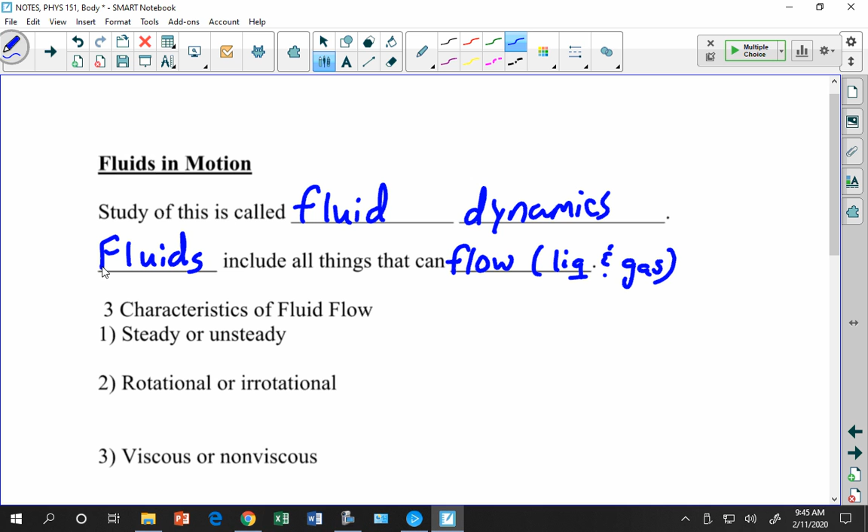Okay. So this study is called fluid dynamics. We've already said this, but fluid includes all things that can do what? They flow, right? That's the root of the word, to flow. And flowing things include liquids and gases. So all liquids and gases are fluids, but we'll see that actually we're only dealing with liquids, and not even all liquids, but just a subset of liquids.

Because we're looking at an ideal fluid flow, we'll need to look at these different characteristics.

I'll know pretty soon. All right, so characteristics of fluid flow. Along the way, I'll circle the ones that are for an ideal fluid, but you can probably guess as we go through them, or you probably already know it. They can be steady or unsteady. An ideal fluid flow, which is what we'll be dealing with, means that the velocity at a point doesn't change.

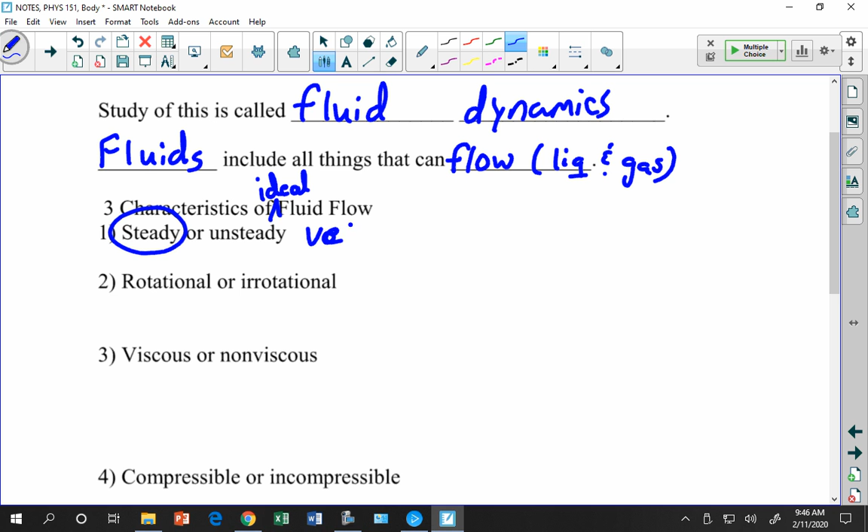And the important thing here is at a point, because we'll find that the velocity of our fluids will change quite a bit depending on their scenario. But what we're saying is that at one point, at that particular point, or any one point in the fluid, the velocity will be constant.

Rotational or irrotational, which one of those is a characteristic of an ideal fluid? Irrotational, right? It doesn't rotate.

Yeah, that's a funny prefix, isn't it? Ir. Are there other words that have that as a negative prefix? Irregardless? Irrational? Well, there are a lot. I just thought it was that one word. But I guess anytime you have a word with R, it takes the IR prefix. Is that right? It sounds right to me. I just made that up. I think it might be true.

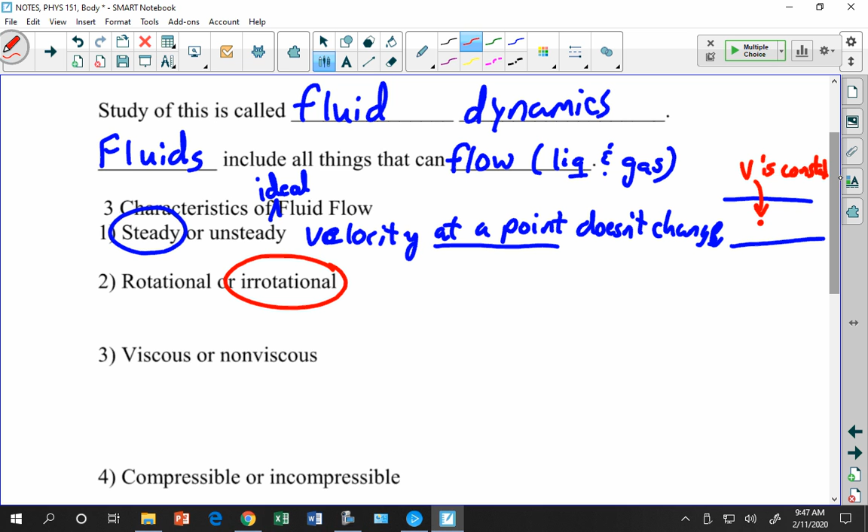Irrotational fluids simply don't rotate. Can you think of a good example of a rotating fluid? You can, you're just too embarrassed to mention it, right? The toilet. When you flush the toilet, that's a rotating fluid. Were you thinking of something else? What was it? Okay. Anyway, so that's a rotating fluid. It's not ideal. We're not going to consider that. We'll just think of fluids that flow in a straight line.

And then viscous or non-viscous, we're looking at non-viscous fluids. Viscosity describes the friction between the molecules. That was straight from the book. Right, the ones that I'm circling are ideal fluid. I think I'll talk about this in a bit. All right.

So some non-viscous fluids, for example, water is a fairly non-viscous fluid. Most watery things. Can you think of viscous fluids? Oil, grease, syrup. Blood is also somewhat viscous, and so later we'll talk about how that impacts the flow of blood.

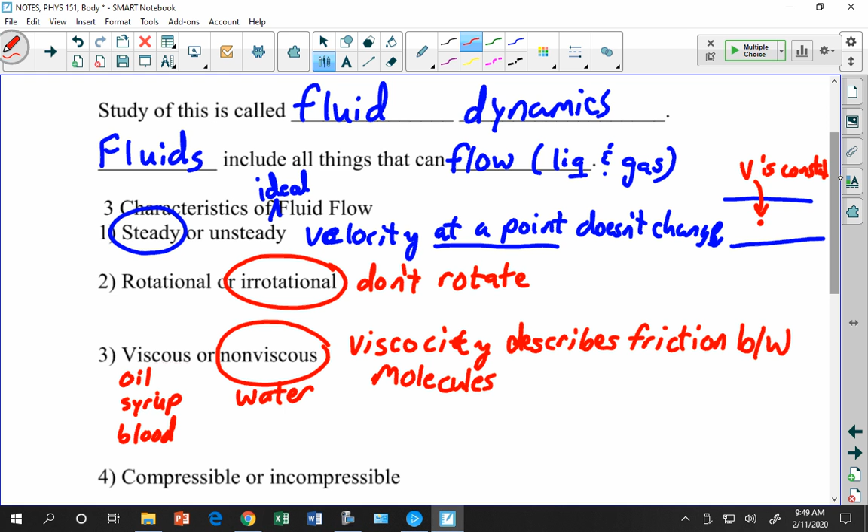Although we'll consider blood flow to be an ideal flow, it's not exactly an ideal flow. We'll find that actually there are unsteady flows, rotational flows, viscous flows of blood through the body, and turbulent flows.

Compressible or incompressible, incompressible is an ideal fluid. That just means that when you apply pressure, the volume is constant. So incompressible fluids are liquids. Compressible fluids are gases.

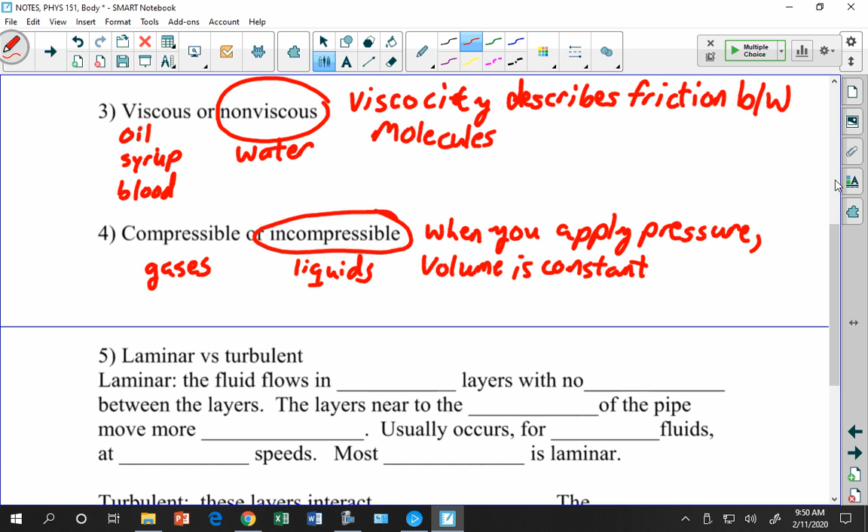And then laminar versus turbulent. The fluid flows in parallel layers, or you can imagine it flowing in parallel layers with no interaction between the layers. Have you ever seen a video of one of those air tunnels? They put the car in there and then they put the smoke to go around the car.

I'll draw a picture. If you have a car and they send these layers of fluid around the car, they use smoke to sort of track where the fluid goes. And so you get these non-interacting parallel layers of smoke or fluid that go around the car. The point is that they don't interact. These two layers of fluid, as they flow, will never come together because they are a laminar flow instead of a turbulent flow.

The layers near the sides of the pipe will move more slowly. So if I have a pipe with different layers of laminar flow, the sections over here on the side will move slower.

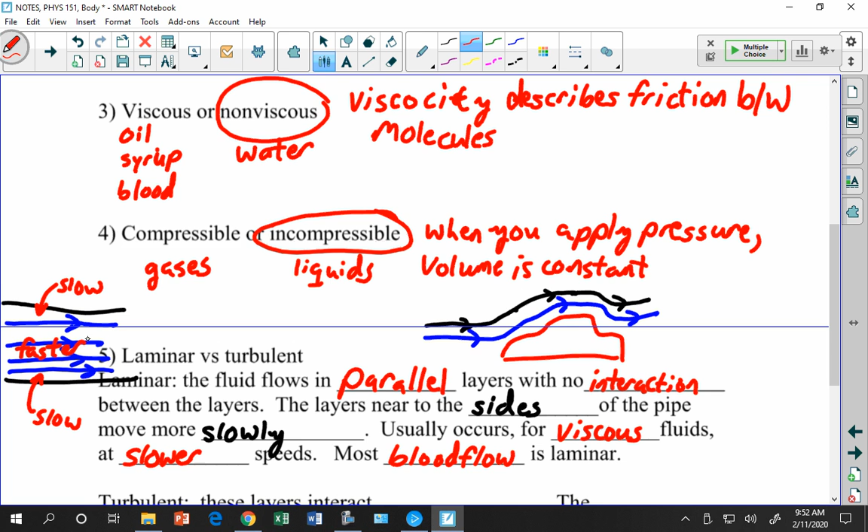But we'll find that there is one part of our circulatory system that's not really laminar at all. Do y'all know where that is? In the heart. So we have very turbulent motion in the heart, where all those layers get all mixed up. But as it goes through the veins and the arteries, it's fairly laminar. In turbulent motion, these layers will interact unpredictably.

If you're a scientist and you study the flow of fluids, usually if you want to predict what turbulent motion is going to do, you have to use a computer program to actually run through each step. There's not really a law that just says, okay, this is going to describe all situations of turbulent flow. The velocity of the fluid changes a lot.

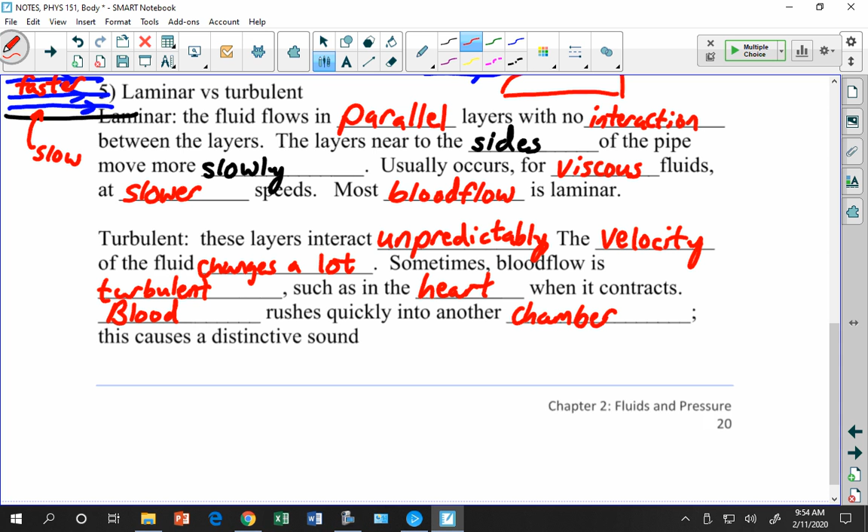And sometimes blood flow is turbulent, such as in the heart when it contracts. And when that happens, blood rushes quickly into another chamber. Of course, that makes a distinctive sound. I don't know what the sound is. What is the sound? Y'all know this. No, it's not the heartbeat. It's something, the swoosh or something. What's it called? Come on, y'all are allied health folks. It doesn't matter. But it makes a distinctive sound. You can hear it when you're listening.

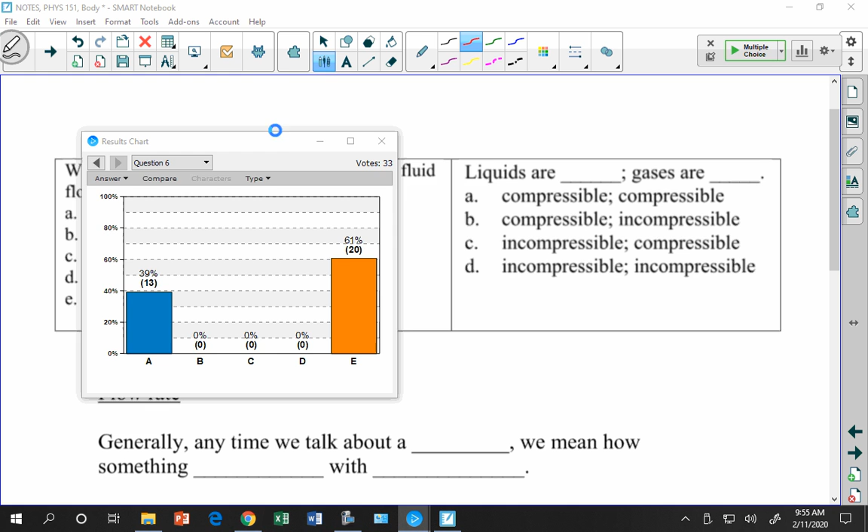Okay, so which of these is not a characteristic of an ideal fluid flow? You can use your notes. The one on the left. Which is not characteristics of ideal fluid flow? Okay, y'all are sort of split. You can look back in your notes if you want. It's just on the very previous page, I think. Is it the previous page? Yeah. All right, let's stop at 50 seconds. Ask your neighbor if you like. Okay. No, wait a minute.

Yeah, so all of these are characteristics. So this was laminar versus turbulent, irrotational versus rotational, steady versus non-steady. You don't have to write these down if you don't want. There's just our non-viscous versus viscous. And all of these are properties of ideal fluid flow, and all the others are not properties of ideal fluid flow. All right, liquids are what and gases are what? Compressible or incompressible?

By the way, I went to a seminar last week, and they were talking about how to create the perfect multiple choice question. And they said that you should never use all of these or none of these. And I was sort of surprised by that. I like using those, but I think most students think that that's never the answer. Is that right? Y'all think that all or none is not usually the answer? It's not true, right? Is it usually the answer? Yes. No, it's not. I do it all the time. It's not my answer. Okay, not on my test. Huh? Oh, yeah, it doesn't count for me. All right.

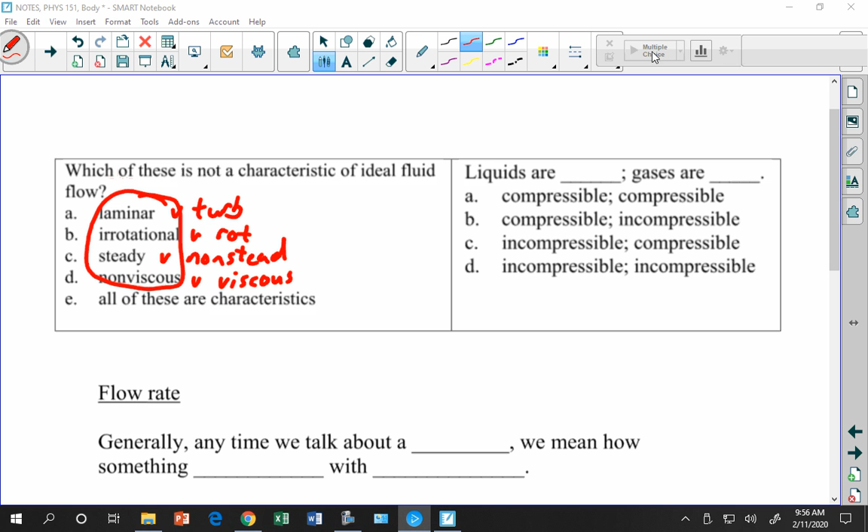So let's stop at 55. 55. Oh man, you all got it right. Oh, one of you snuck in there, huh? That's okay. So C is the right answer. Liquids are incompressible and gases are compressible.

So the police came by my house this morning and they knocked on my door. And I come to the door and it's like, sir, can I have a quick word with you? I said, sure. How about velocity? You get it? That's a quick word. Okay, so no.

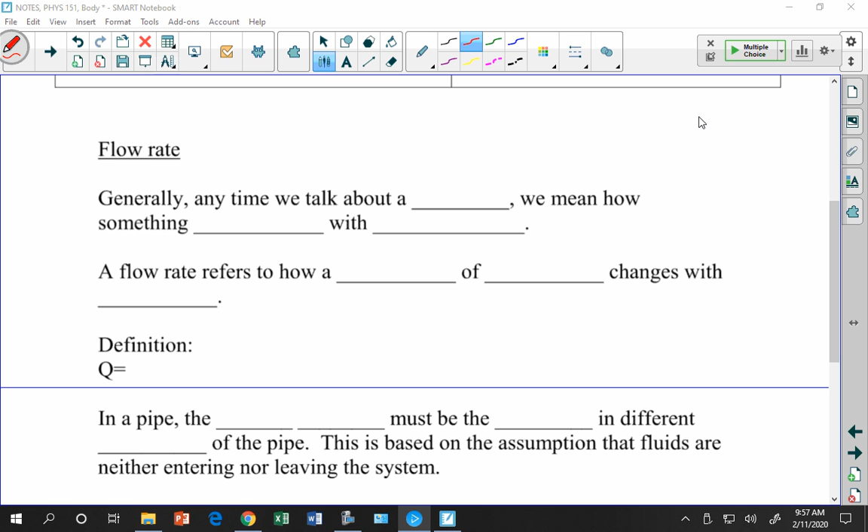Generally, anytime we're talking about a rate, we mean how something changes with time. Like you had a question, I think, didn't you, about volume flow rate? Oh yeah, so when you pump gasoline into your car, the flow rate is about 3 gallons per minute. And I asked you what is the definition of flow rate. So in that, you sort of had to know what gallons was, or you had to know what a flow rate was. But it was a what per time for flow rate?

Volume per time. Gallons is a measure of volume. It's not a measure of area, weight, or mass. It's a measure of volume. So a flow rate refers to how a flow of fluid changes with time.

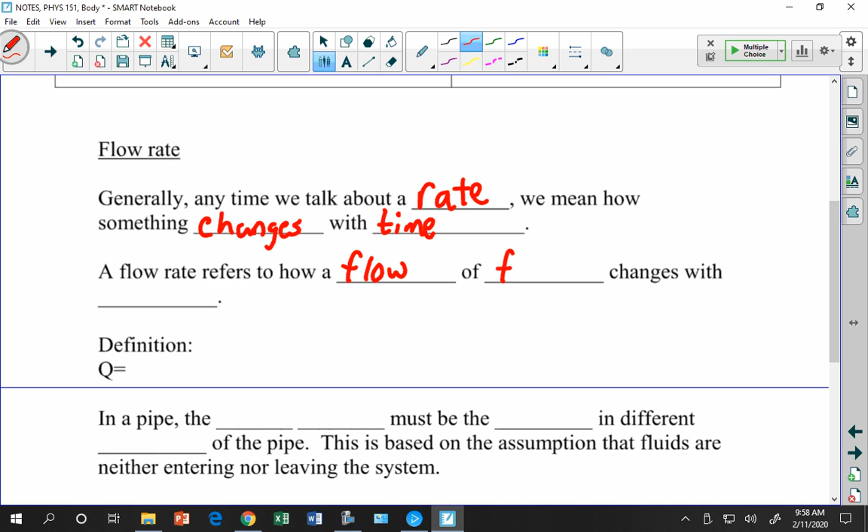We're going to use Q to represent flow rate, and we're going to let Q be equal to volume per time. Okay, so remember that. Q is flow rate. And later we'll look at some different equations that affect the flow rate. In a pipe, the flow rate must be the same in different parts of the pipe.

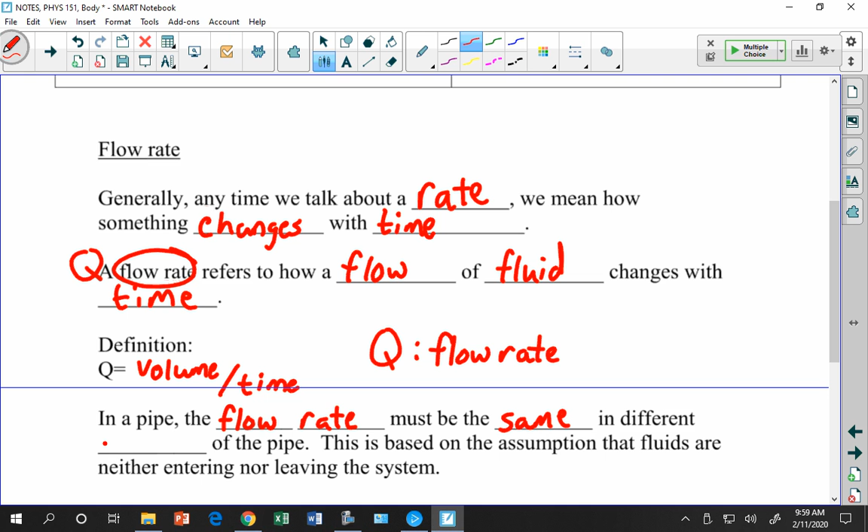So if I have a pipe and I have a flow rate over here of 1 cubic meter per second, that means that I have a cubic meter of water. Well, these squares on the floor are about a square meter. So you can imagine a cubic meter is like a box about this size that's filled with water. That would be a cubic meter of water. And every second, that cubic meter of water moves past the point. So this whole thing will move over here in 1 second. That would be 1 cubic meter per second.

And so if I have a cubic meter moving past this point every second, then I also have to have the same here and here and here. Because as that cubic meter moves down the pipe, it's going to displace the fluid in front of it, right? So here's my cubic meter. It moves in 1 second, and in 1 second again, and in 1 second again. So I have to have the same flow rate throughout the entire pipe. So I have 1 cubic meter per second over here, and then on and on and on. That might seem obvious to you here because the pipe doesn't change shape.

But it's also true that if I have a pipe that gets bigger, then I'm still going to get a cubic meter per second throughout. So if my flow rate is Q1 over here and it's Q2 over here, then Q1 has to equal Q2. And that is the flow rate equation. Anytime I have a flow rate here, which is a measure of the volume per unit time, it might be cubic meters or gallons or liters per second, then I'm going to have the same flow rate over here. It has to be, right?

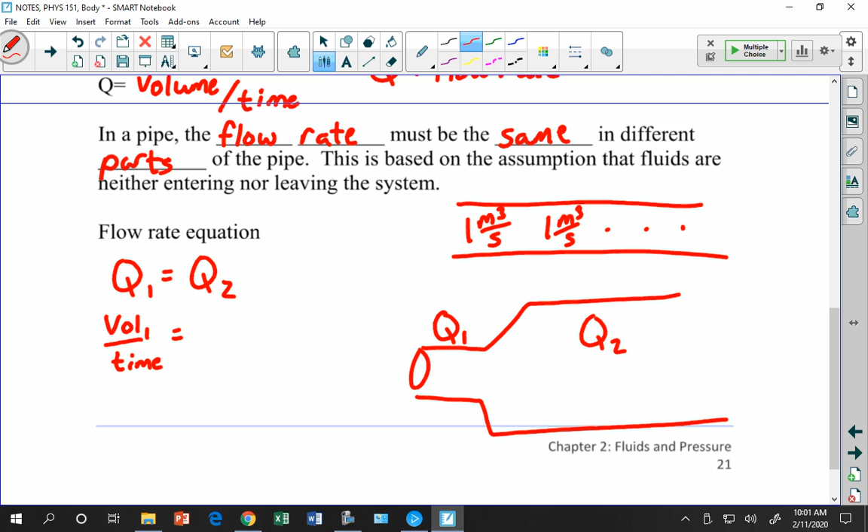Unless, of course, I have other pipes that are coming in, or I have a leak in the system where stuff is getting out, or if it's a compressible fluid. If it's a compressible fluid like a gas, then it doesn't have to be the same flow rate because that gas can get compressed along the way. Okay, so the flow rate equation then is a volume per time, and it says that volume 1 over time has to equal volume 2 over time. Well, let's look at this flow rate, which is volume over time.

Remember early on, we described a general way that we can think about volume. We said that volume can be expressed as an area times some distance. For example, with a cylinder, the volume of that cylinder is the area times the height of the cylinder. So in general, when I talk about volume, I can think of it as some cross-sectional area that's multiplied by some distance, just thinking about it dimensionally. You remember that? Are you with me on that?

Okay. If I look at the dimensions of those, area is in square meters, D is in meters, and so that's going to give me units of cubic meters, which is the same as what I have in volume. Just dimensionally, it works out okay. And so if I substitute here, instead of volume, I have area times some distance divided by time, and I have something that stands out to me. What is this D over T? Remember what that distance over time represents?

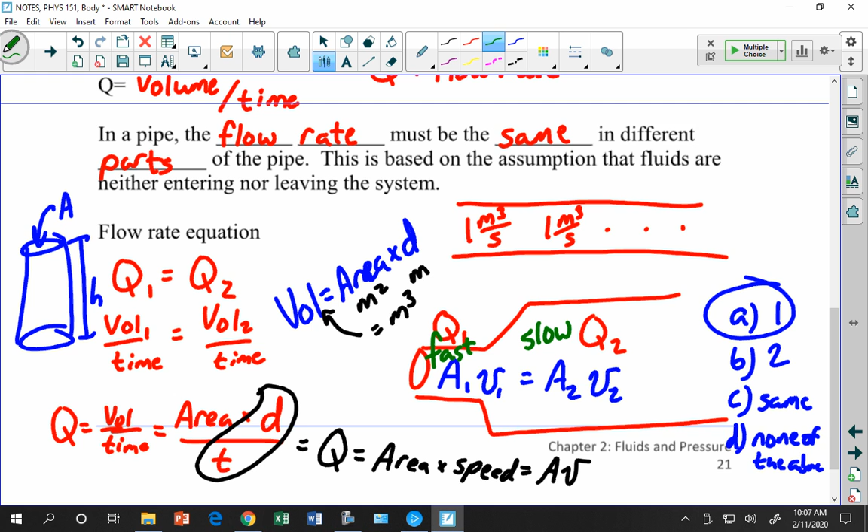Let me write that in one more way. AV is constant. That means that whatever I do to this side, I have to do to that side the exact opposite. If A is big, V is small. If A is small, V is big. That's called an inverse relationship. You don't need to know that word, but you do need to know how to operate with inverse relationships.

If one variable goes up, the other variable goes down, because this has to always remain a constant value. The flow rate is always constant. So if one of the variables goes up, the other variable has to go down. Big area, small velocity. Small area, big velocity. Expect questions about that on the test, and probably some calculations with it. That'll be with simple numbers. Okay.

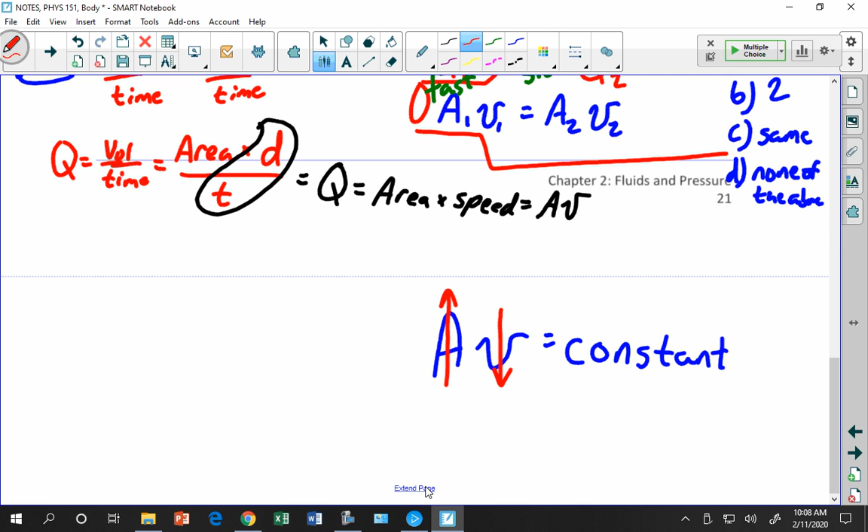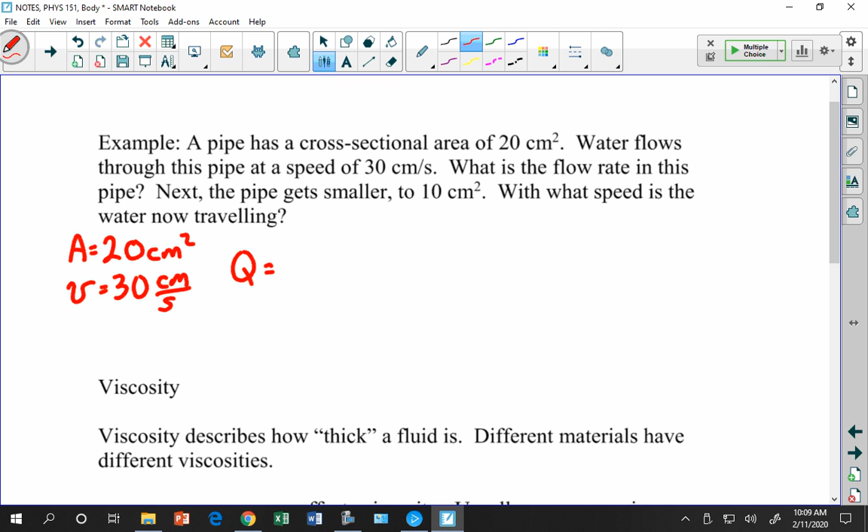Let's try this. A little example. I have a pipe with a cross-sectional area of 20 square centimeters, and water flows through it with a speed of 30 centimeters per second. I'm going to write some of these down. A is 20 square centimeters. V is 30 centimeters per second. What is the flow rate, first of all? What is Q? Q is the flow rate. And if I want to know the flow rate, it's going to be A times V, or 20 times 30.

And that's 600 cubic meters per second, or cubic centimeters per second. Y'all know what a cubic centimeter is? Another word for cubic centimeter? What does cubic centimeter start with? Cubic starts with a what? C. All right, cc. So a cc is just an abbreviation for cubic centimeter.

Did y'all know that? Did you? You didn't know it? Is it obvious? It's not obvious to me. It could be something else. Maybe it is obvious, but a cubic centimeter is about this much volume. You know another measurement for a cubic centimeter? Milliliter. Who said that? Hackett? Yeah, so a milliliter is a cubic centimeter is a cc. Anyway, so this is 600 cubic centimeters per second.

Then the pipe gets smaller. It goes to 10 square centimeters. What speed is it going to be traveling now? So my area initially is 20. I'll call this A1, this V1. A2 is going to be 10 square centimeters. Hey, if the area goes down, what happens to the speed? It's going to go up. It's an inverse relationship. And in this case, it's a linear inverse relationship.

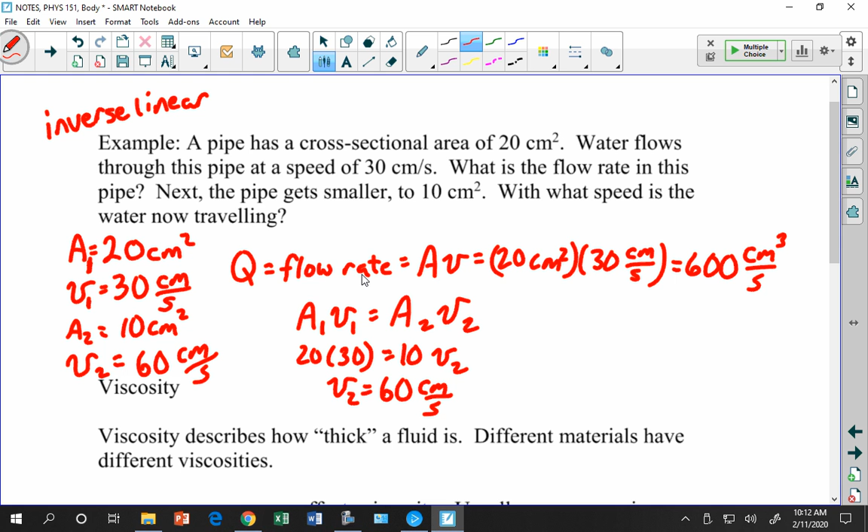All right, so viscosity determines how thick a fluid is, and different materials have different viscosities. Temperature affects viscosity. Usually colder is more viscous. So I'll show you a video maybe today. Colder is more viscous. That sort of makes sense, right? If things get cold, they just flow less quickly, less readily. The viscosity affects the flow rate.

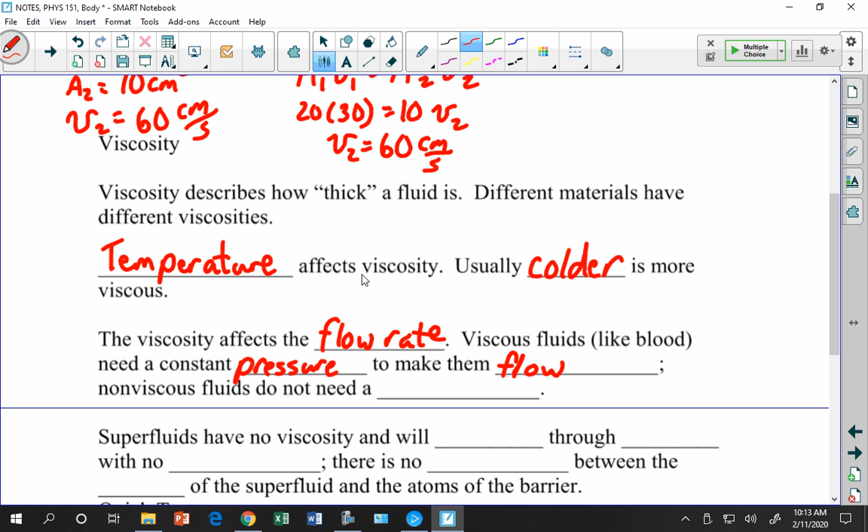Viscous fluids, like blood, which is kind of viscous, need a constant pressure to make them flow. Non-viscous fluids do not need a pressure. I don't know what words these are supposed to be. I don't have them in my notes. I just have a line drawn through them. Superfluids have no viscosity and will move through.

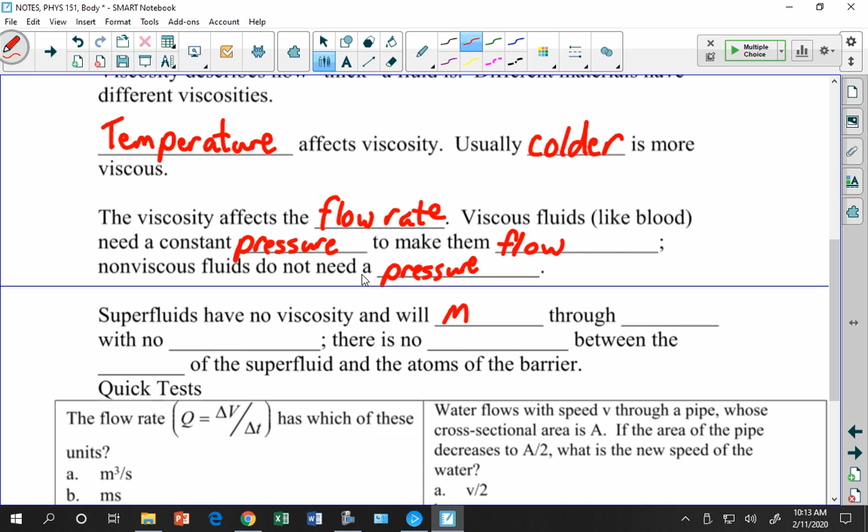I'm sorry, I'm just making this up. I have no idea what I meant to do here. I'm not going to test you on it, but I want to show you a video, okay? Let's do these questions first, and then I'll show you the video. I guess last year I did the same thing because I didn't go back and look at my original notes to see what I meant to say there. I'm sorry. Take it out of my paycheck, okay?

Let's try the one on the left. Flow rate has which of these units? Flow rate is change in volume over change in time. All right, let's stop at 43. 43. Come on, y'all. Just guess if you don't know. All right, good. A is right. It's in cubic meters per second. That's a volume per unit time.

And then water flows with speed V through a pipe. Its cross-sectional area is A. If the area of the pipe decreases to A over 2, what is the new speed of the water? All right, I'm going to stop at 43.

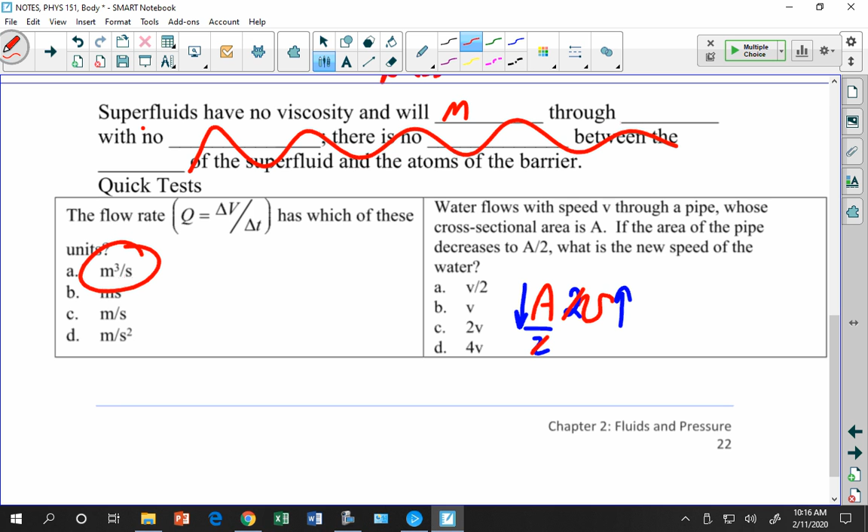Okay, C is right. If I decrease the area by a factor of 2, if this goes down, this has to go up. If this is divided by 2, this must be multiplied by 2. Because I know the product of A and V is constant. Whatever I do to one, I have to do the opposite to the other so they cancel out. So I'm doubling the velocity, so C is the right answer. Let me show you a video.